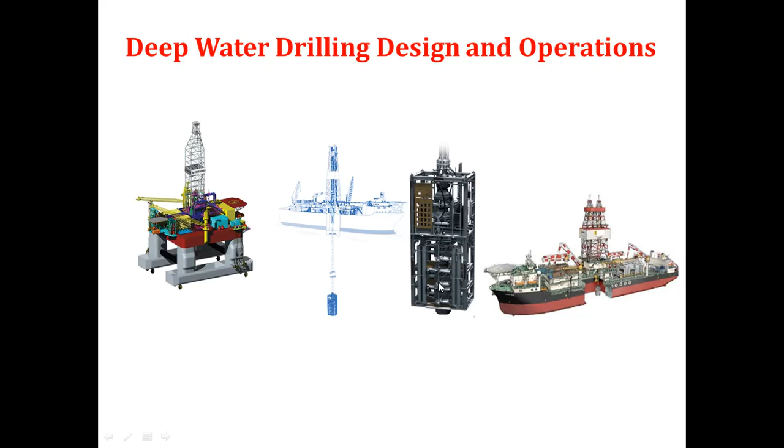So we will talk about the semi-submersible rig. We will talk about the BOP and its controlling system, which is totally different than the surface one. And we will talk about the drill ships here.

So first of all, our course content: we will take an introduction about the importance of deep water and about its economical effect in the last 10 years at least, and about its future promising projects.

Then we will talk about the drill ships and semi-submersible rigs. Why? Because these are the only two rigs that can drill in deep water. Deep water can reach 2 kilometers of water and 3 kilometers of water. This is a very complicated technology, and we have to learn at least some notes about it.

Then we will talk about some equipment which is the main difference between surface and deep water drilling. It's called the marine riser, and we will talk about some of its components and their function, which is very important. Then we will talk about IWCF for subsea, which is deep water BOP and its well control system.

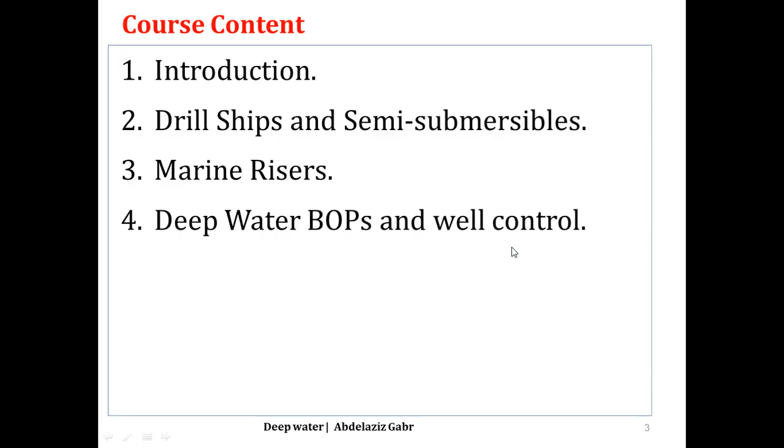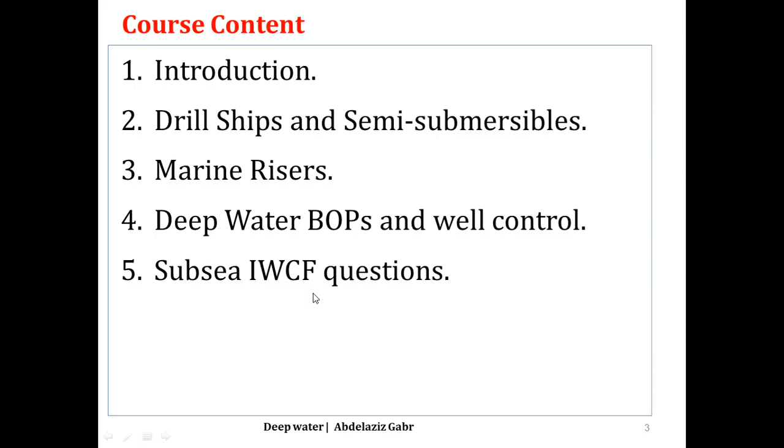This is very important and complicated. We will talk about it in deep detail. Then after this, we will take some questions about the subsea IWCF. So it will be very helpful, inshallah, for our job, or for anyone who needs to take the subsea IWCF.

So why deep water? Because the future oil demand will remain strong. There are some developing countries now which need oil for their industries. So all the time we are under demand for oil. All the world depends on the oil and gas industry. This is very important because it's the backbone of any industry, or even of our life.

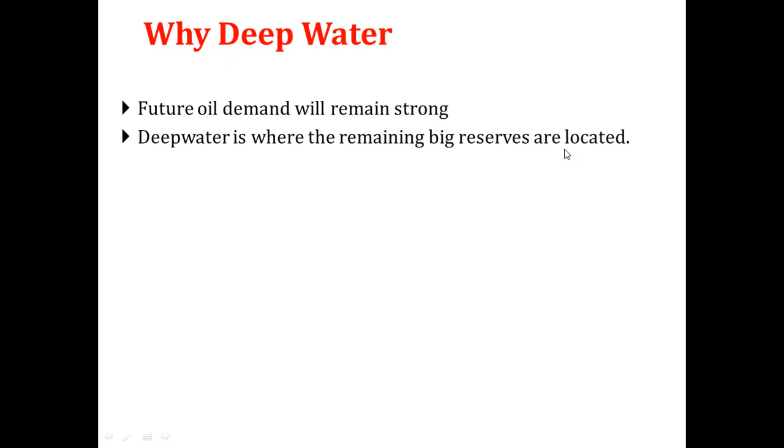So this is very important, so we have to discover more and more potential and more reservoirs all over the world. Now the technology is going to check for deep water drilling, where a lot of big reservoirs are still under this deep water, especially in the Middle East and also in the west of Africa. Deep water is also where the remaining big reserves are located, because the technology before was not able to drill these wells efficiently and economically.

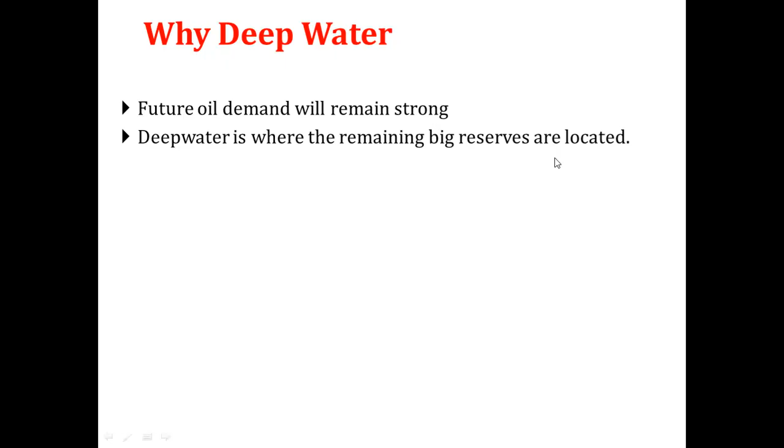But nowadays, by using AI technology and other high technology, we can drill these wells in the deep water without any issues. Deep water will account for almost 25% of global offshore production by 2030, compared to just 15% right now. So this means the future is mainly for deep water drilling and its technology.

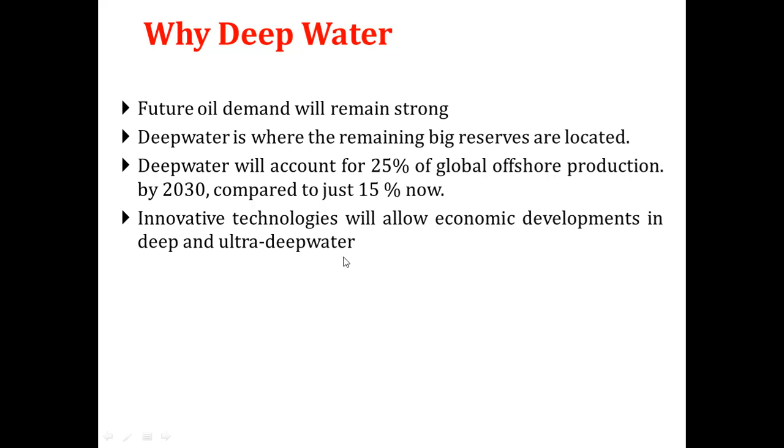Innovative technologies will allow economic development in deep and ultra deep water, so we will get more and more from these deep water drilling reserves.

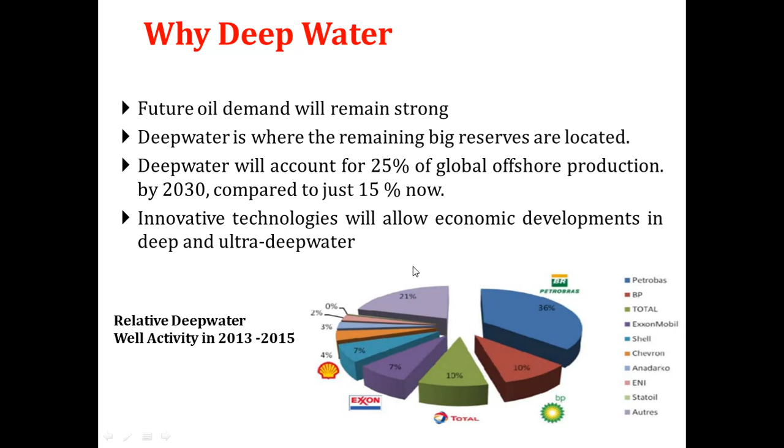So how much does a deep water well cost? Actually it costs very high. But you have to take into account an important issue: from COVID, the supply chain all over the world has changed.

The power, oil and gas that before were accessible somewhere are now sometimes not accessible, especially due to the war between Russia and Ukraine, so the gas is not coming to Europe for example. So they have to search for other sources, like what they got from Norway, and this comes from deep water also, and also new countries like Angola and other countries in the west of Africa, and even in the Middle East, in the Mediterranean Sea we are searching also. Most of the conflict in the Middle East is about taking their share from the gas reserves there.

So here, Oklahoma: 3,000 feet, it takes 5 days and only $90,000. Albania: it's about 15,000 feet for 400 days. This is very critical, by the way.

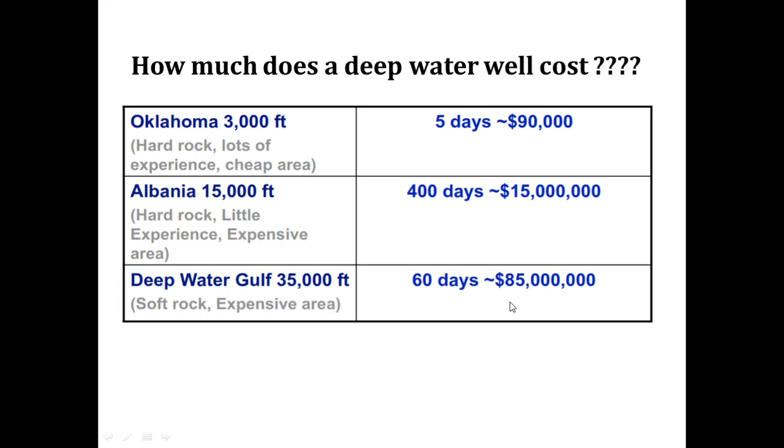It's about 400 days, not 100 days, which costs around $15 million. For deep water Gulf at about 35,000 feet, it takes 60 days and costs $85 million. But the most expensive well ever was the BP Caspian Sea well.

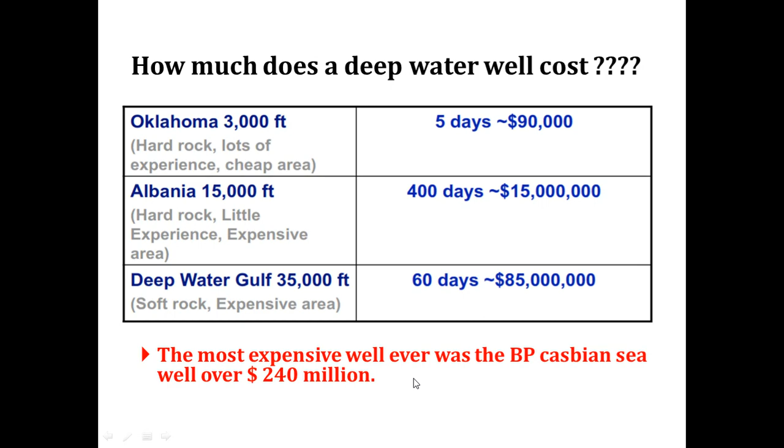That Caspian Sea well cost about $240 million, which is very, very expensive, until they get the potential. So now let's look at discoveries and potential discoveries for the future.

This shows the actual and forecast numbers for deep producing fields by region. For example, in 1998, the technology was not available yet, so only about 25, 26, or 28 fields were producing, around 28, and they were discovering about that same number.

As you see here, the US share, in the US Gulf, is the most common. Then after it is Brazil, since they have the main technology. Then West Africa, by Angola and Nigeria, comes to similar shares after discoveries in the Atlantic Ocean.

Within just 4 years, you can see how the potentials and discoveries increased from 28 to 96, which is almost 4 times the activity. So this is very important.

Here are the discovered and estimated potential deep water reserves worldwide, in billions of barrels or equivalent. For example, the US Gulf is about 23. Angola in West Africa is about 25 billion, which is its potential, and its discoveries have increased, with very high potential as well.

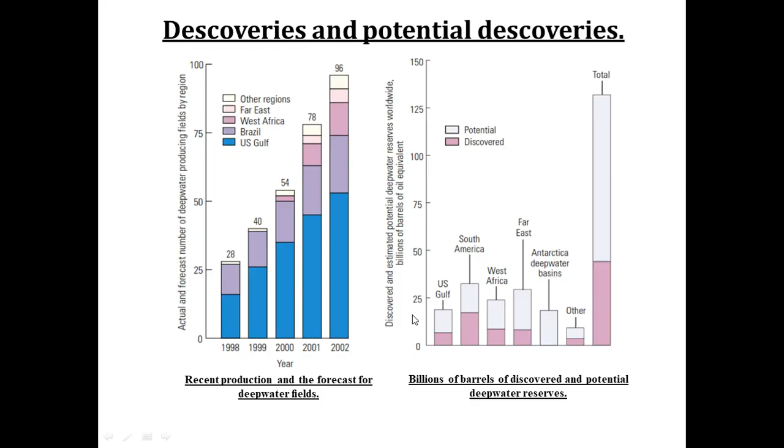For Antarctica, or the southern pole, there is also a large potential, meaning that in the future it could be exploited, and we could make good use of these reserves there. So these are the billions of barrels of discovered and potential deep water reserves.

So how do they drill in deep water? We have two main types of rigs. Number one is the semi-submersible rig. As you see, this semi-submersible is free-floating, and some of its parts are submersible in the water.

Once you finish, you can directly evacuate this water so it becomes floating and go to another location. It can also be fixed in place by tensioners and a dynamic positioning system. It can be used in deep waters more than 400 feet, or more than 120 meters.

It has a large hull made of pontoons supporting large diameter columns that support a large topside area. It is very stable in rough weather due to the size of the submerged part, which is usually filled with ballast water for more stability.

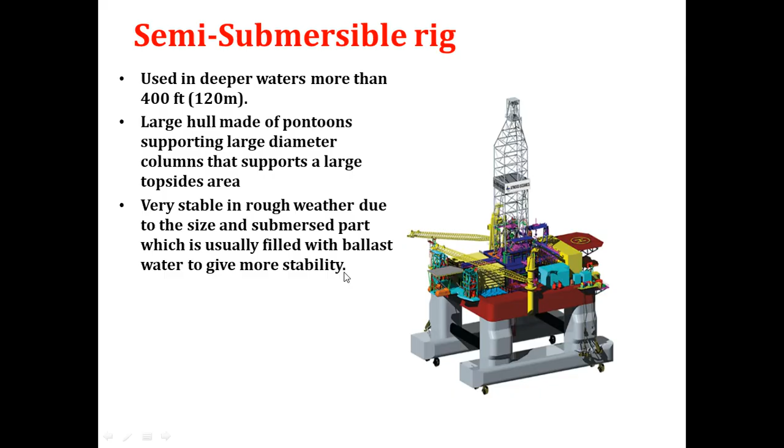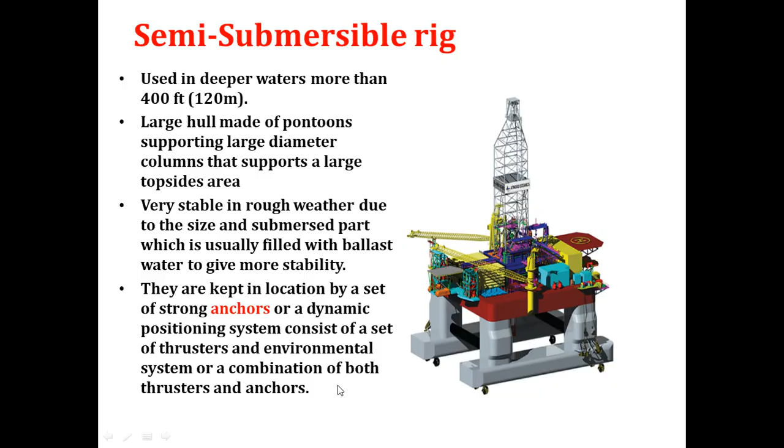They are kept in location by a set of strong anchors, or a dynamic positioning system consisting of thrusters and an environmental system, or a combination of both thrusters and anchors. So this is the semi-sub, let's check further.

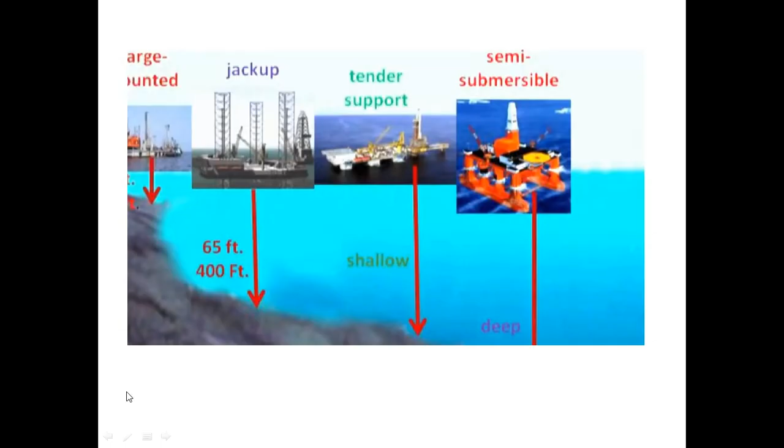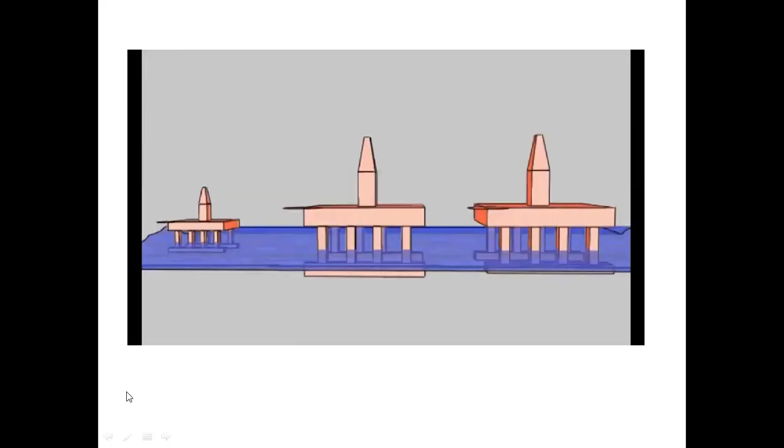Semi-submersible rigs are used in deeper offshore locations where water depth is usually greater than 400 feet. These large rigs float, are seaworthy, and very stable in high seas. They do not sit on the ocean floor like jackups, but are held in location by anchors and thrusters on each of the four corners to keep them dynamically positioned. They are self-propelled and can operate offshore anywhere in the world.

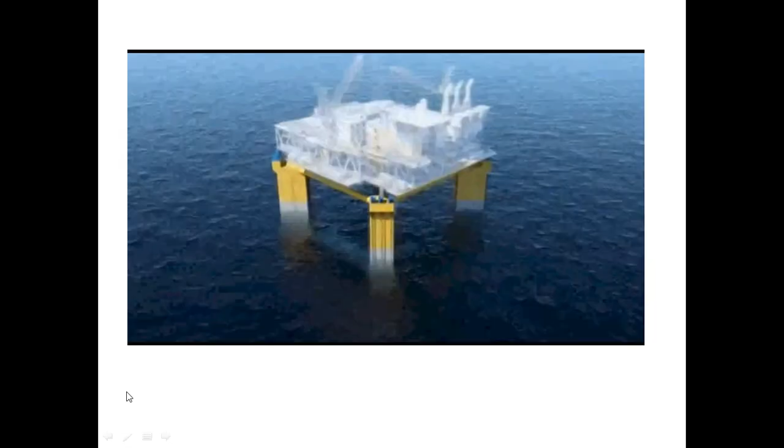Now the second type is called the drill ship. It's a ship, but it's like a city. As you see, there are two masts, meaning there is a main rig and an auxiliary rig, so it can do double the job, doing two jobs at the same time: preparing the rig and drilling simultaneously.

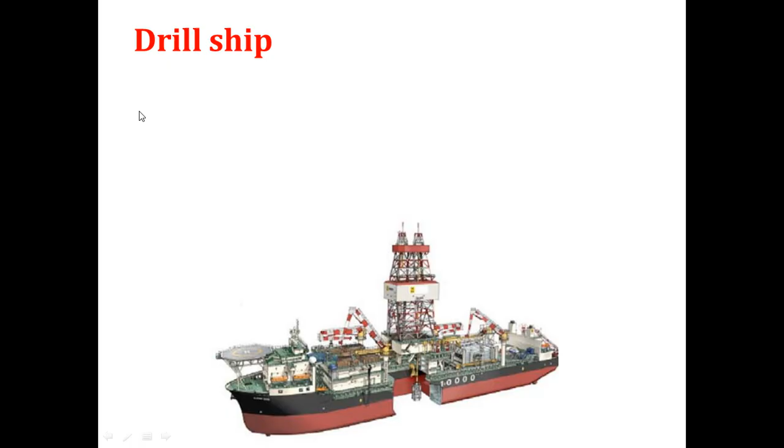It's dynamically positioned using a dynamic system, so no anchors are required. It can operate in water depths up to 10,000 feet, about 3,000 meters. It's mainly used for geological studies and exploration, since they cannot stay in one location for a long time, especially in rough seas.

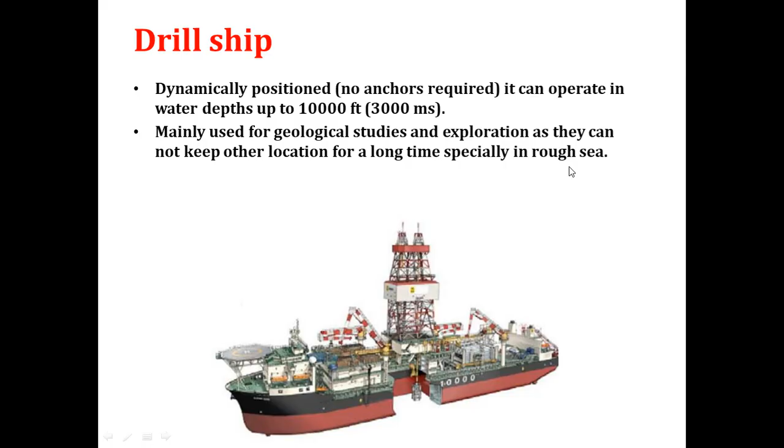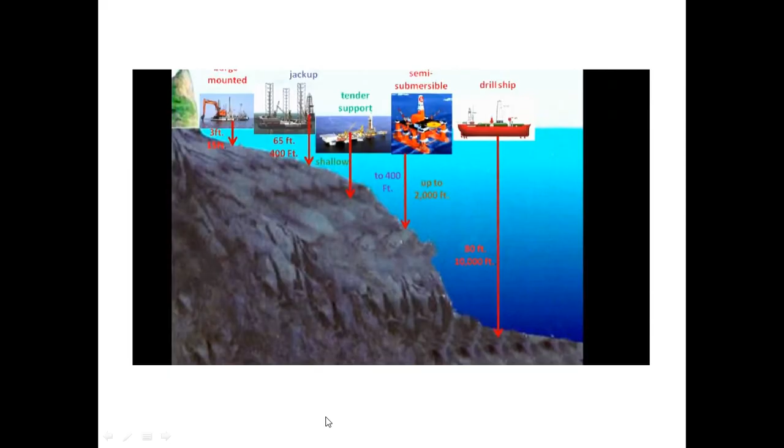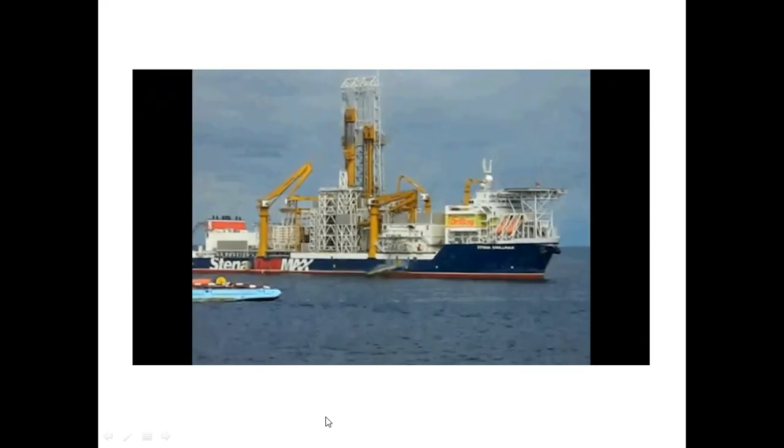Okay, so this is a drill ship. Let's check for dynamically positioned drill ships, which can be used in very deep water where anchoring is extremely difficult, deeper here, but where the sea surface is relatively calm. They can be moved rapidly from location to location. Because drill ships may not be able to maintain their position for long periods in rough seas, they are favored for geological studies and for wildcat wells where permanent structures are not yet warranted.

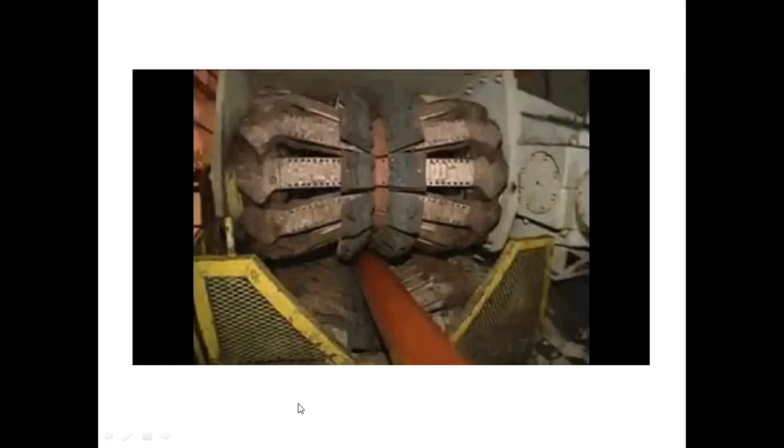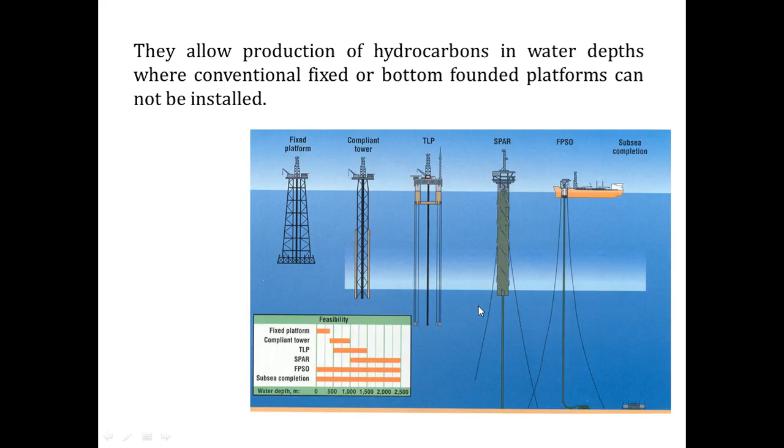Also here, they allow production of hydrocarbons in water depths where conventional fixed or bottom-founded platforms cannot be installed. As you see here, this is a fixed platform for this one, but this is a compliant tower, and this is TLP, spar, and this is also subsea completion, which is very complicated technology, by the way. But actually, as you know, this can be also reached.

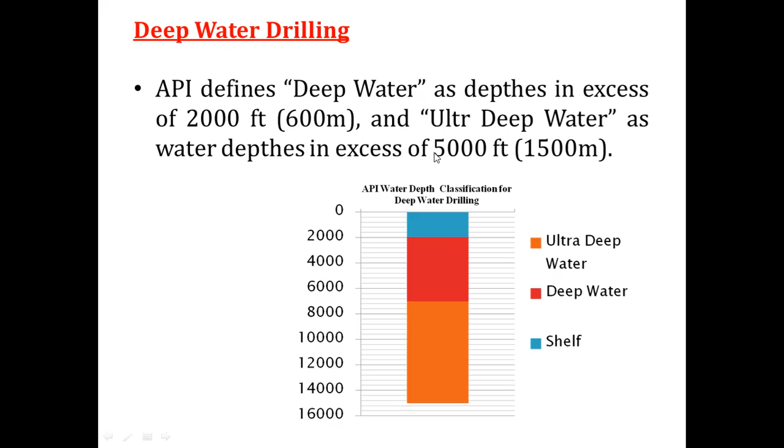So what is the meaning of deep water drilling? Actually, API defines deep water as depths in excess of 2000 feet or 600 meters, and ultra-deep water as water depths in excess of more than 5000 feet, which is 1500 meters, by the way.

So let's see this video about the deep water drilling operation and check it together, by the way.

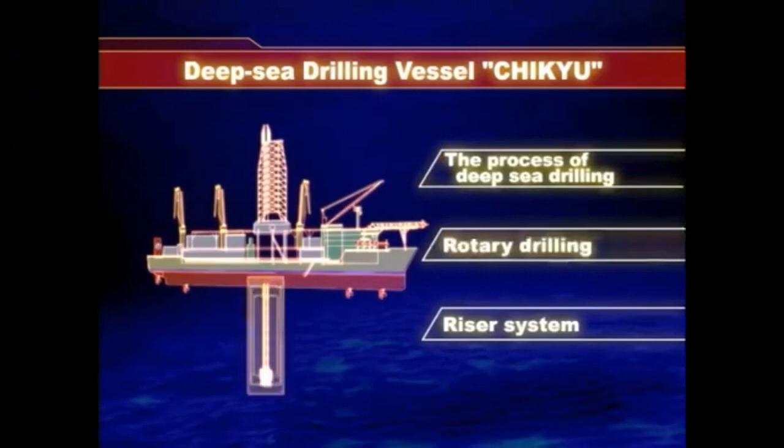How does the deep-sea drilling vessel Chikyu drill into the seafloor? When the vessel arrives at the drilling site, it receives a satellite signal that helps the vessel move into the exact position required. The vessel has 6 propellers that rotate a full 360 degrees and keep the vessel in one position, preventing it from drifting due to wind, waves, or sea current.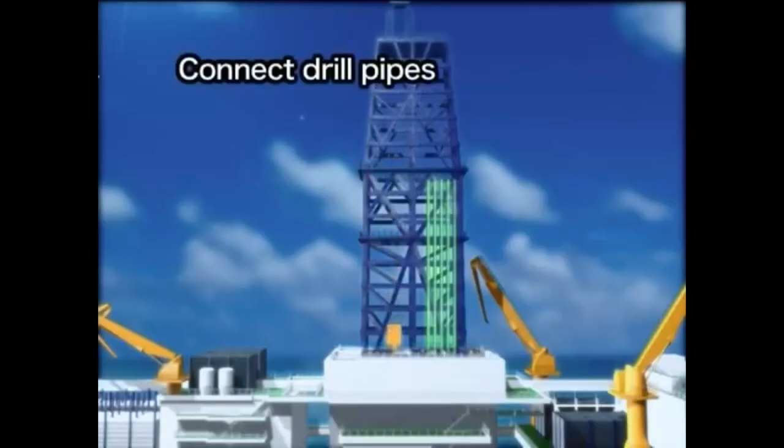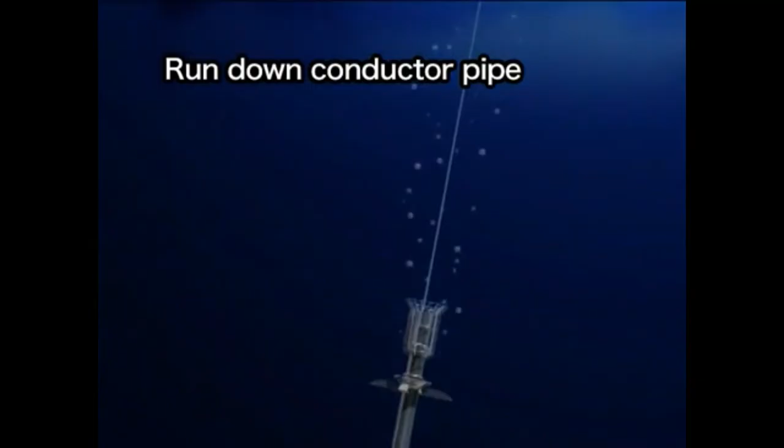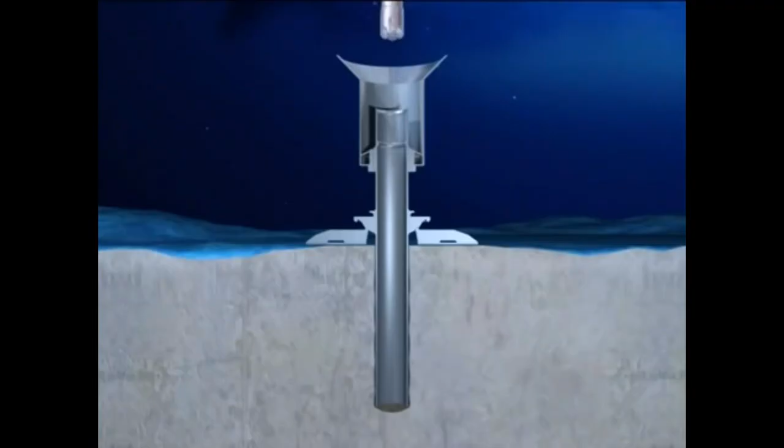First, the conductor pipe is installed. As the drill pipes are connected, the conductor pipe and guide are run down to the seafloor. After the conductor pipe penetrates the seafloor, the drill pipe is released and pulled back to the vessel. A large drill bit connected to the bottom of the drill pipe is run down to the seafloor. The drill bit is led down to the bottom of the hole through the conductor pipe. The drill bit rotates and drills the sediment and rock below the seabed.

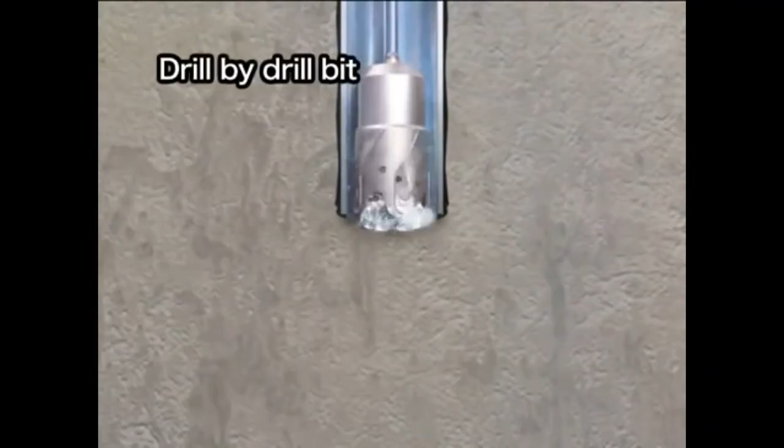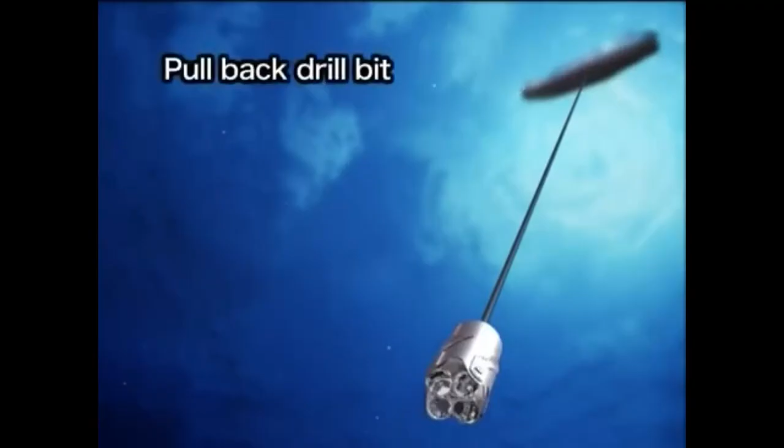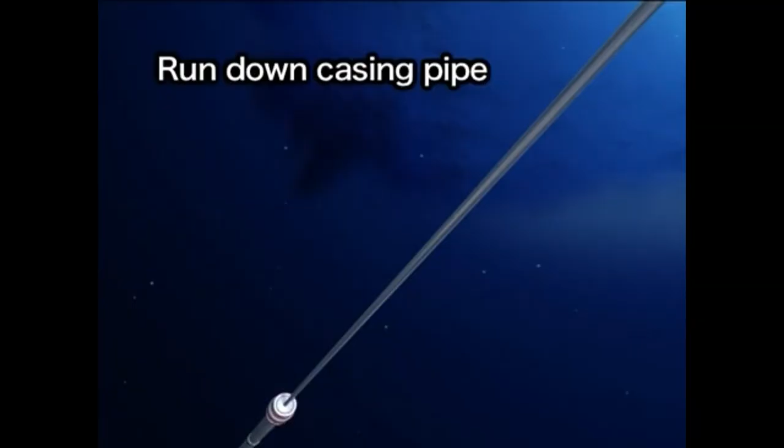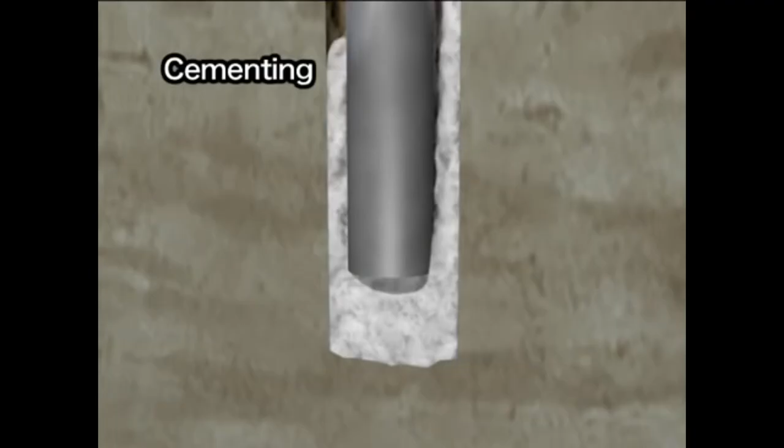Seawater is sprayed from nozzles on the drill bit to raise the cuttings to the seafloor. After drilling several hundred meters, the drill bit is pulled back to the vessel. A casing pipe, about 50 centimeters in diameter, is set into the drilled hole to keep it from collapsing. The casing pipe is run down through the conductor pipe and inserted into the hole using the drill pipe. Cement is pumped into the space between the hole and the casing pipe to fix the pipe in place. After cementing, the drill pipe is released and pulled back to the vessel.

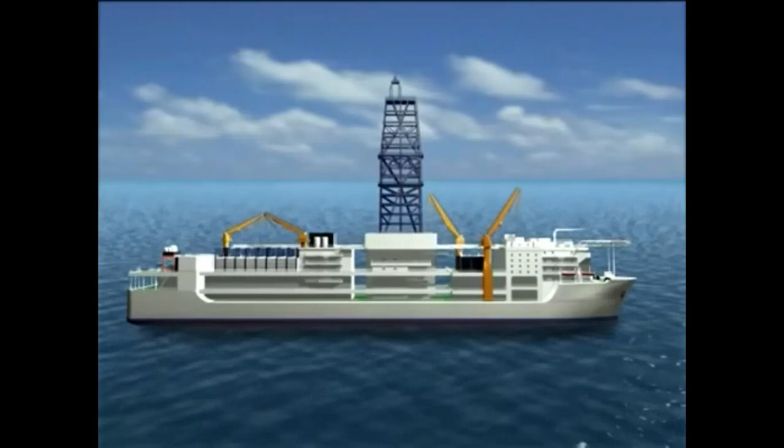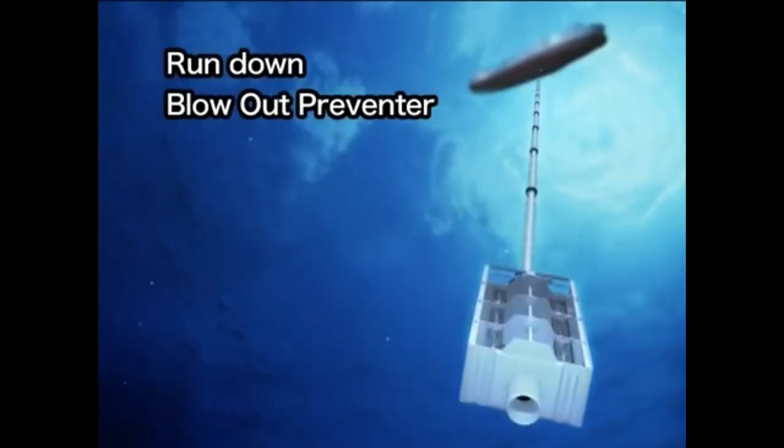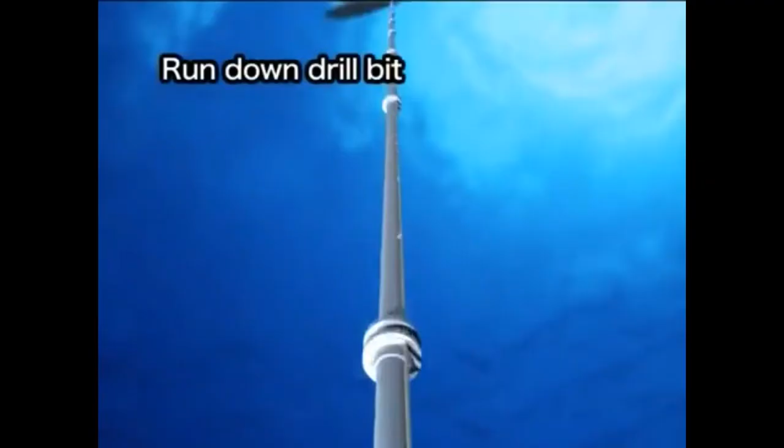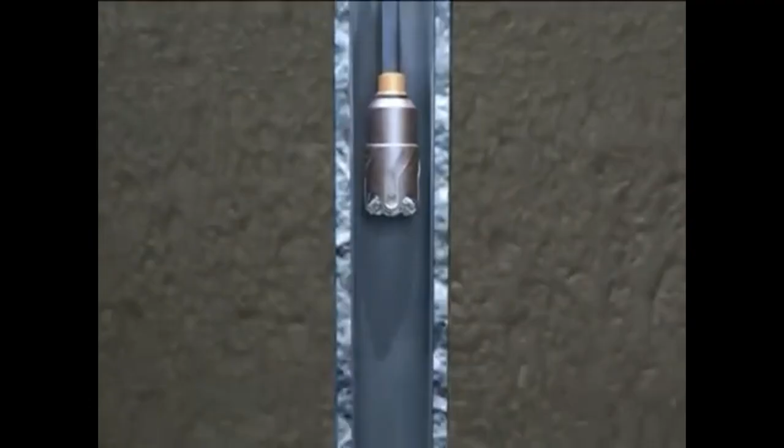The Chikyu is equipped with the riser system in order to drill into the earth even deeper. As riser pipes are added one after another, the blowout preventer is run down to the seafloor. The blowout preventer is connected to a wellhead located on top of the casing pipe. The vessel is now connected to the seafloor via the riser pipe. A drill bit, smaller than the one first used, is run down through the riser pipe and casing pipe. Drilling begins. Once the riser pipe has been connected, drilling mud is used instead of seawater. When the target depth is reached, the drill bit is pulled back to the vessel.

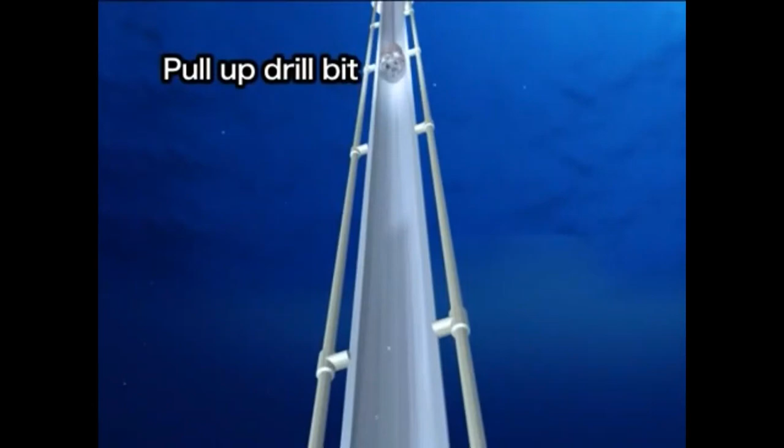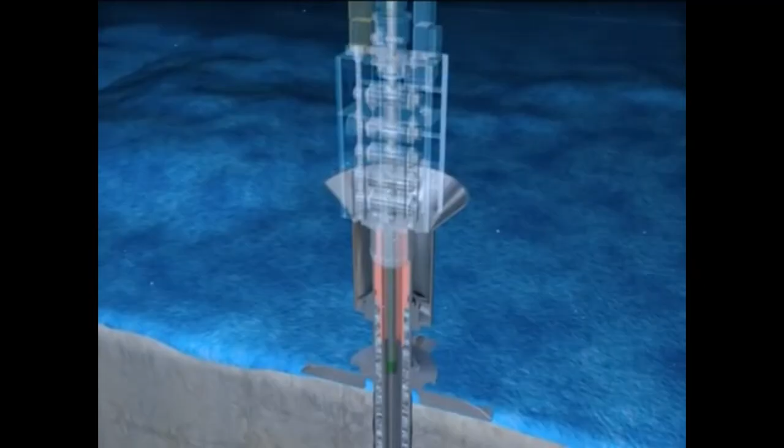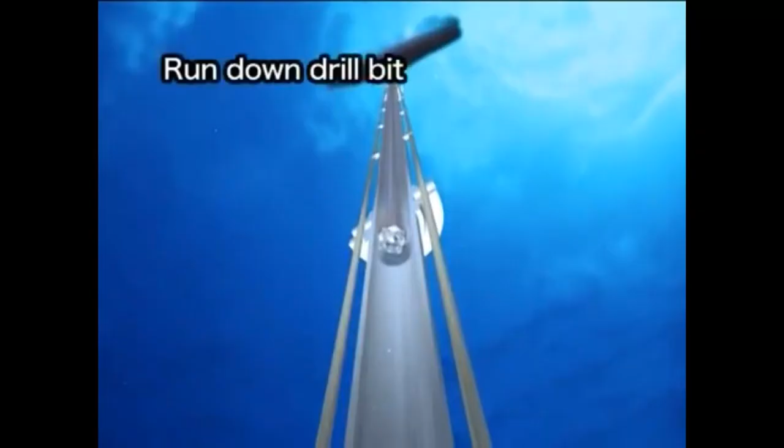To drill the hole even deeper, a narrower casing pipe is set in to protect the drilled hole. After the casing pipe has been installed, cement is pumped into the space between the hole and the casing pipe to fix the pipe in place. Again, an even smaller drill bit is run down through the riser pipe and casing pipe, and the drilling continues. Repeating this process, the Chikyu will drill through the ocean crust to collect fresh, live mantle. This is something that has never been done before.

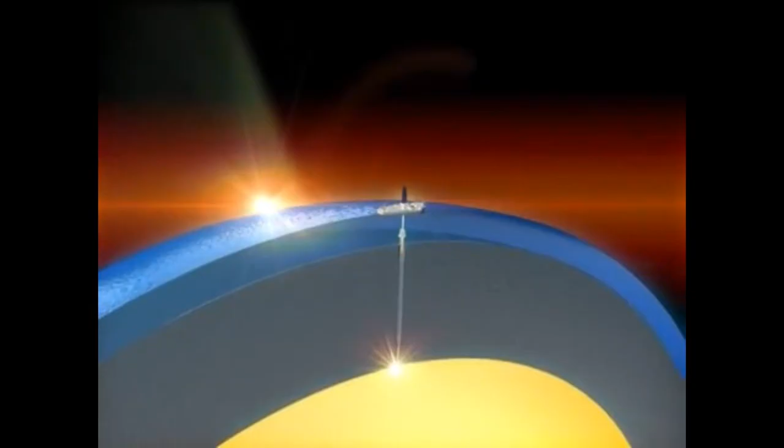Okay, this was the first video, and let's check out the rotary system.

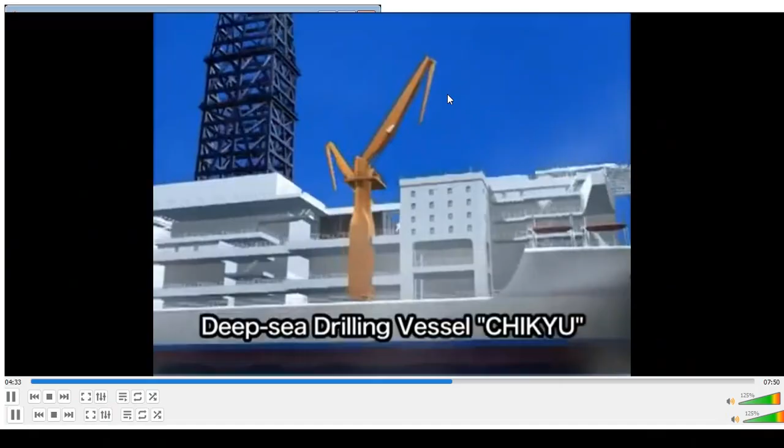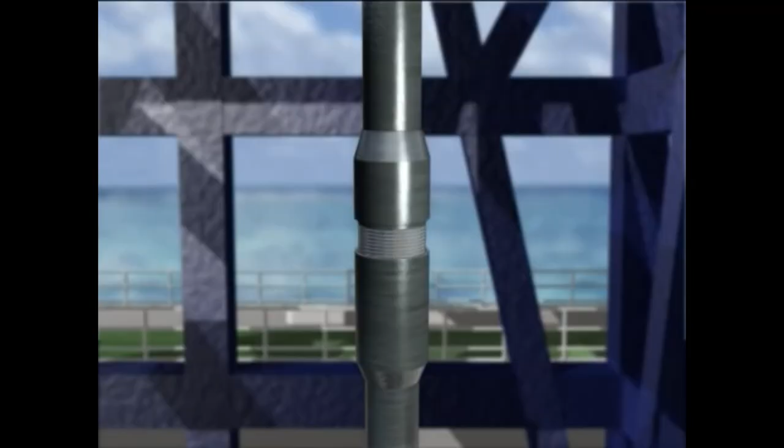Rotary drilling is used for ocean drilling. Let's look at the features of this method. First, the drill pipes are connected one after another as they run down to the seafloor. The work of connecting the drill pipes and drilling the hole is powered by a motor on the derrick. The drill pipe has a drill bit attached to the bottom. With rotary drilling, the drill pipe is rotated and the drill bit at the end crushes sediment and rock to make the hole.

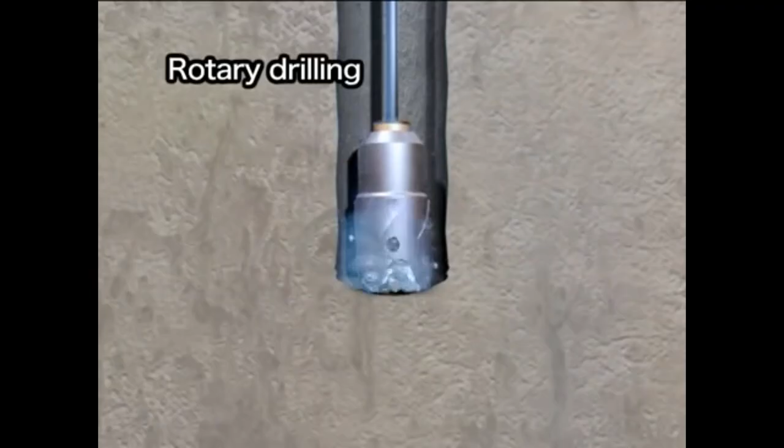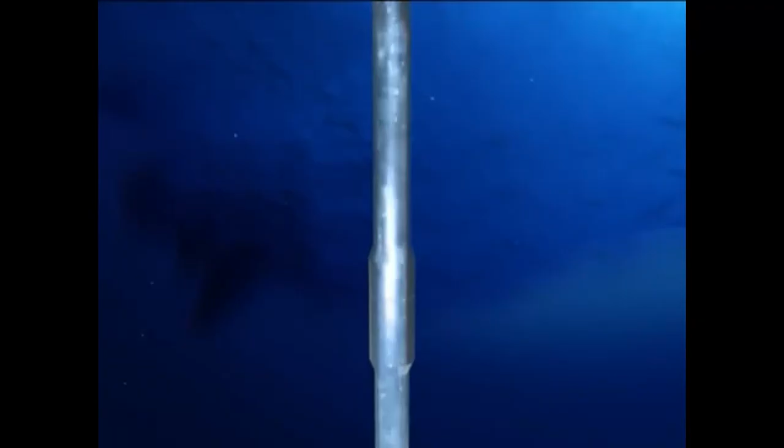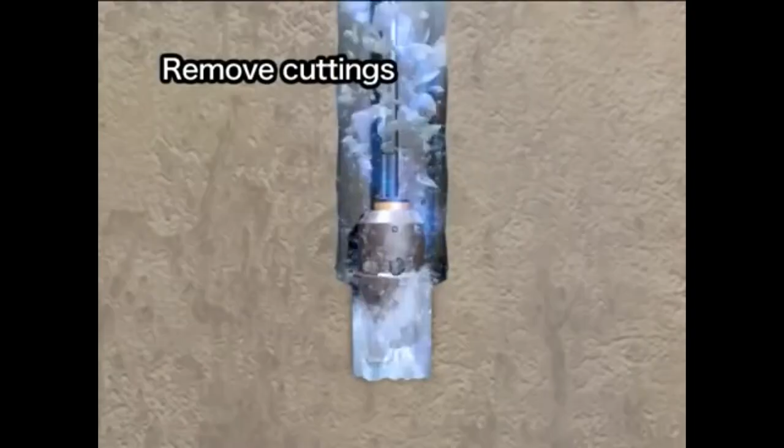After a while, cuttings accumulate at the bottom and drilling cannot go any further. Seawater or other liquid is then pumped from the vessel down through the drill pipe and is jetted out of the nozzles on the drill bit. This liquid current forces the cuttings up to the seafloor. That is rotary drilling.

The deep-sea drilling vessel Chikyu can drill over 7 kilometers below the seafloor.